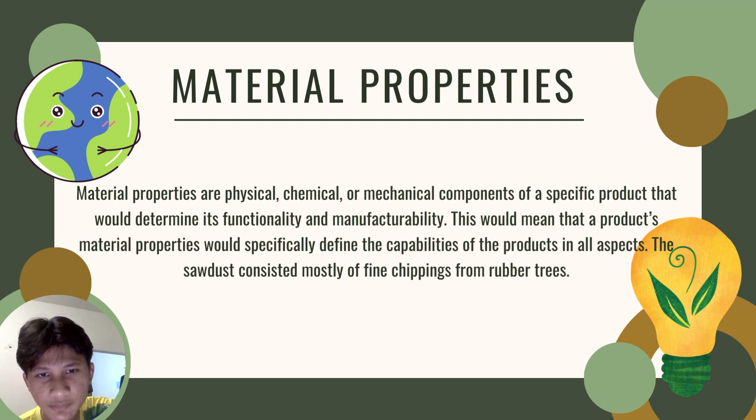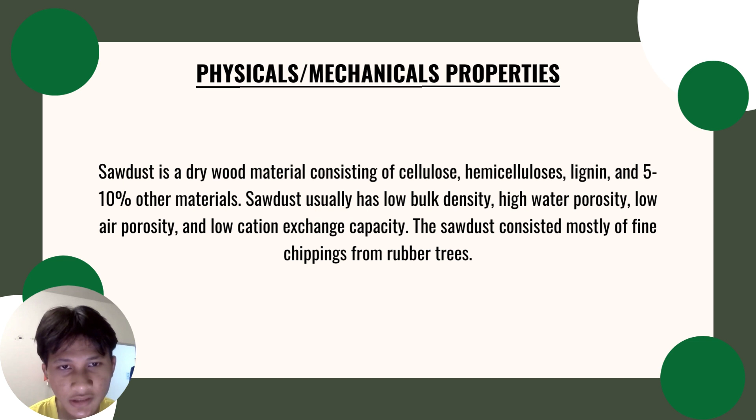Next is physical and mechanical properties. Sawdust is a dry wood material consisting of cellulose, hemicellulose, lignin, and 5 to 10% other materials. Sawdust usually has low bulk density, high water porosity, low air porosity, and low cation exchange capacity. The sawdust consists mostly of fine chippings from rubber trees.

Chemical properties. The main chemical components of sawdust are carbon 60.8%, hydrogen 5.2%, oxygen 33.8%, and nitrogen 0.9%. Dry wood is primarily composed of cellulose, hemicellulose, and minor amounts, about 5 to 10%, of extraneous material. It is non-degradable organic waste because of its low nitrogen content and high lignin and cellulose content.

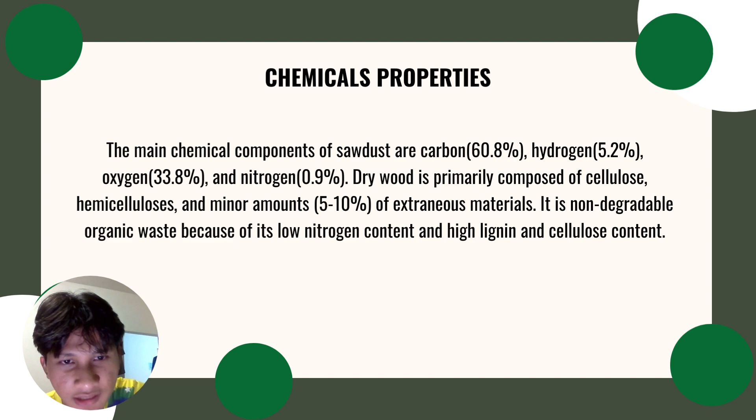Assalamualaikum, I'm Dafina Inshira binti Saha. I will explain to you the procedure of making sawdust. First, make sure the sawdust is in good condition before starting the process. Second, mix sawdust with resin, a kind of glue. Third, the sawdust and resin mixture is put into a machine that squeezes it out in a flat sheet. Fourth, the sheets are dried. Last, the sheets of particle board are stacked flat until they are shipped to a lumber yard.

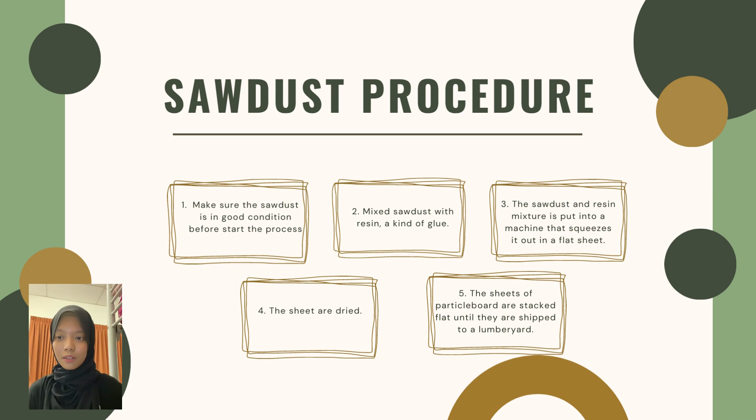Next, I will explain the standard test procedure. In this standard test procedure, we will test the water absorption of the particle board. First, 0.60 mm, 1.18 mm, and 2.00 mm particle sizes were used in this experiment. The 2-hour and 24-hour water absorption and thickness swelling tests were performed.

Next, the specimens were taken out of the water and the surfaces were dried using a clean dry cloth. The specimens were reweighed to the nearest 0.1 mg within 1 minute of removing them from the water and reweighed regularly at 2 hours, 24 hours, 48 hours, and up to 72 hours exposure. Last, the water absorption of each specimen was calculated by the weight difference. In this standard test procedure, we will test whether the particle board can be used in furniture and construction or not.

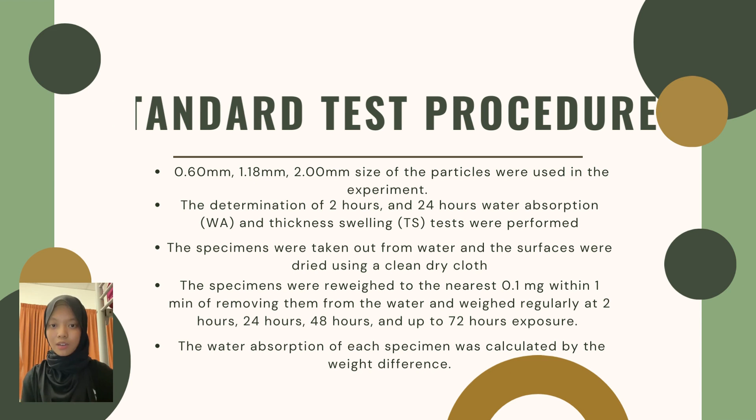Next, process of material application. The process of material application from sawdust to particle board can be used in furniture construction. The weight of wood chips is evenly distributed to make sure the finished board is not top heavy. Compression is applied to the particle board sheets multiple times to create the tightest possible bond between the resin and wood bits.

There are many advantages that can be found in making furniture using particle board, and among them is low cost in the manufacturing sector. Particle board is also lightweight, so it facilitates the work of furniture assembly, and it's perfect for ready-made furniture. That's all from me.

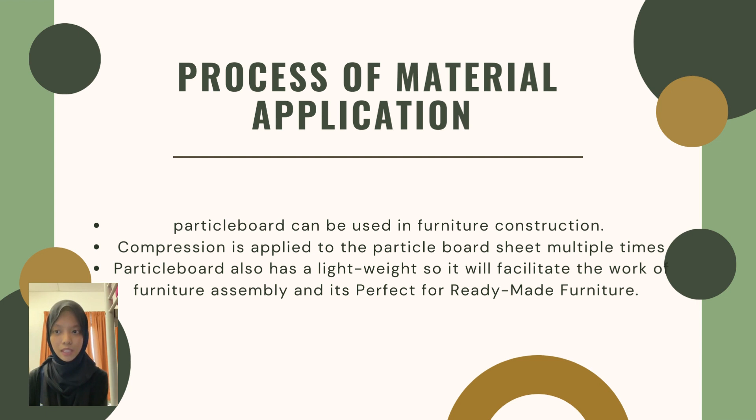Benefits of sustainable construction. Environment friendly. Particle board is made from the scrap of other lumber products. This means that there is no waste when a particle board is manufactured and no extra logging needs to be done to produce a particle board.

Second, low carbon footprint. Particle board is inherently low waste because trees don't need to be cut down, it just uses the sawdust of lumber products. The particle board production process does not create waste and can even be recycled in some cases.

Third, low cost. If we compare particle board and plywood, particle board is cheaper than plywood. Plywood uses a lot of money to manufacture because it needs a lot of activities and can affect the environment.

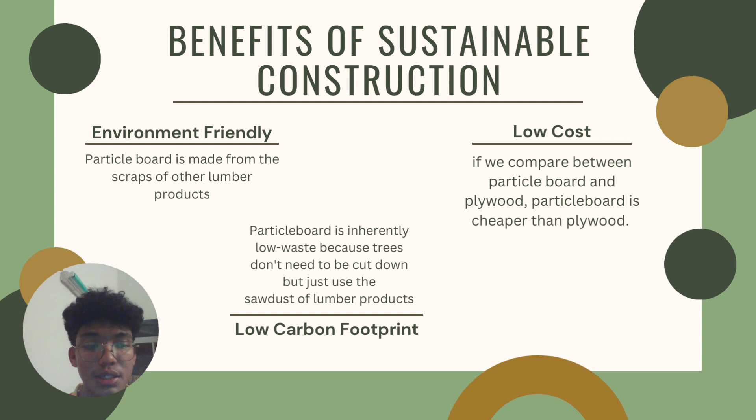If it is about maintenance between particle board and plywood, plywood is water resistant, so you can be assured that your furniture will be safe, while particle board will swell up once it comes in contact with water and gets damaged soon.

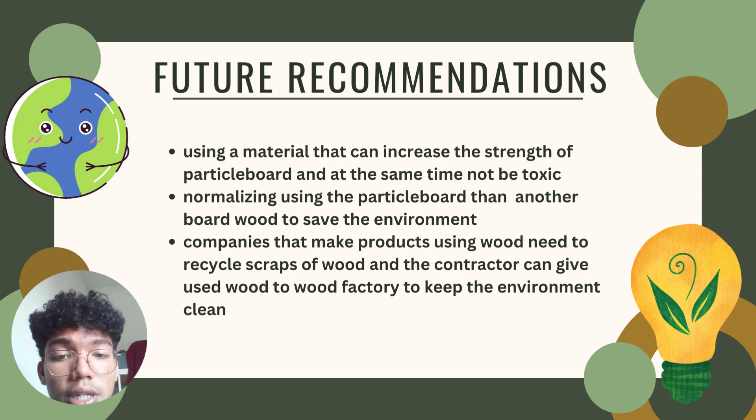So next, future recommendations for sawdust or particle board. Using a material that can increase the strength of particle board and at the same time not be toxic. Normalize using particle board over other wood boards to save the environment. And last, companies that make products using wood need to recycle scrap wood, and contractors can give used wood to wood factories to keep the environment clean.

So we are at the end of our presentation. We have explained the definition of sawdust, and we also saw its material properties, such as physical properties and chemical properties. We also explained the standard test procedures related to sawdust, the process of material application in industry, and our recommendations for the future in industry, especially regarding sawdust.

And then I would like to conclude our presentation: we can see that recycled materials such as the sawdust we have presented are very suitable to be used in certain manufacturing, such as particle board, and construction, such as the grids I mentioned, and anything else related to sawdust. The use of recyclable material has many benefits for the future, the environment, and development in terms of construction and manufacturing.